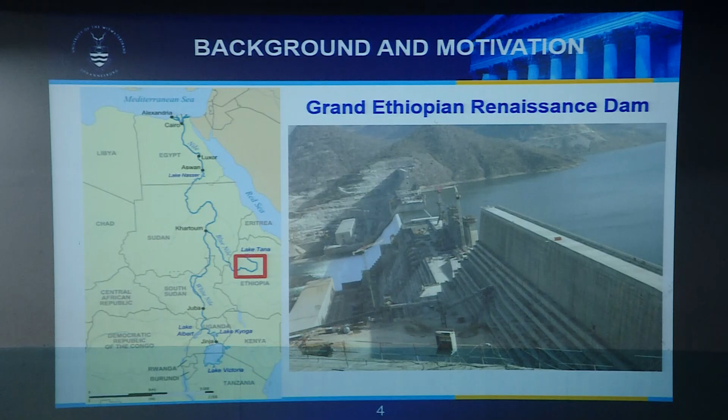I can confirm that this is not working. Maybe just migrate for me. Let me forget about this one. Just migrate forward. Yeah, that's fine.

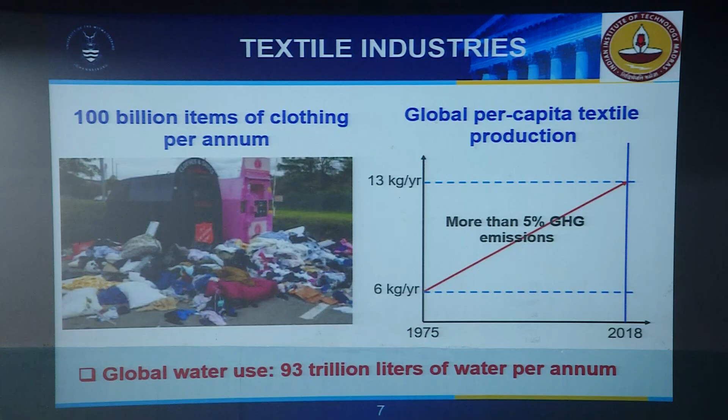Between 1975 and 2018, the global per capita textile production increased from 6 to 13 kilograms per year. That's you and I, roughly. This is how much the amount of clothing we use has grown since 1975. And that alone contributes more than 5% of greenhouse gas emissions in many forms, even before it gets to the grave, where you dispose of it or put it in landfill. The production, from extraction to transportation to processing, involves a lot of greenhouse gas emissions. And globally, this industry alone consumes about 93 trillion liters of water per annum. It's a serious industry that you must look into, and all of us are a part of that in one way or another. That is why we are paying attention to this. But if you go back into history as to where it exactly began, it was in 1989. Zara, by the way, I'm mentioning this.

Normally, I try to avoid names of companies, but this is now well documented everywhere from reliable sources that the first company to go into what is called fast fashion, which was really a game changer for the fashion industry, was Zara in 1989, where it took only 15 days from concept, from the mind of the designer, to where the garment was out there for selling. 15 days. And before then, it would take about 6 months.

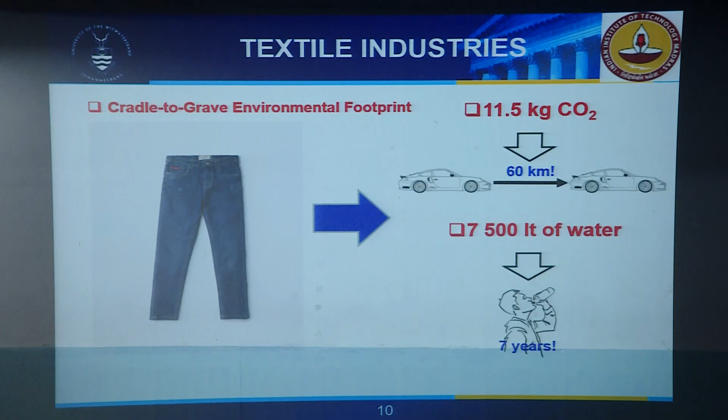And then the amount of water just for a pair of jeans from cradle to grave is about 7,500 liters of water, which is how much we drink in 7 years. A human being would drink that amount of water in 7 years' time. That is just one pair of jeans. So surely it is an industry that we should have been looking at for quite some time now.

And by its very nature, this industry happens to be a batch facility. Some of the presentations we had were about trying to move into continuous operations, particularly with the pharmaceutical industries. But some industries are inherently batch, and this is one of those. I don't think that this one will ever go continuous. So it will remain batch, which means that we still have to deal with the time dimension in this kind of a sector. So this is a typical example.

For example, here you are processing about 4 colors from white to dark. And it tends to have different stages, as you can see here. It mimics what you'd find in an agrochemical facility. That's another facility that cannot be continuous for a number of reasons. So these have their own unique features that make them remain batch. So it is a batch facility, which means that we have to come up with ways of solving this.

Now, batch plants, some of the colleagues here work in batch plants, are very difficult to analyze. We've been trying very hard for many years to come up with practical ways of synthesizing these operations, of properly designing these operations and optimizing them. And we still are trying to do that because of the nature of the mathematical model that comes from there. So continue.

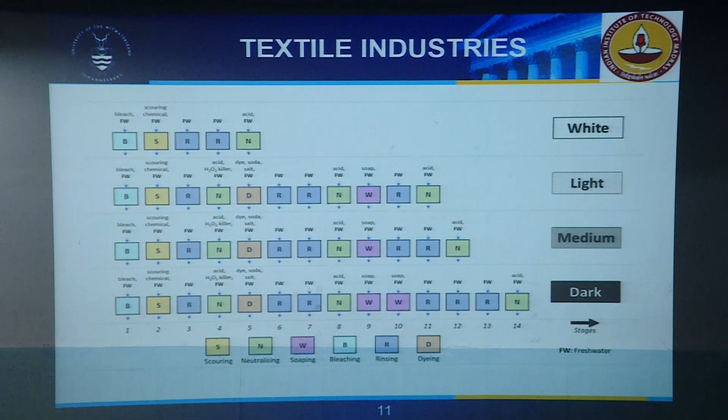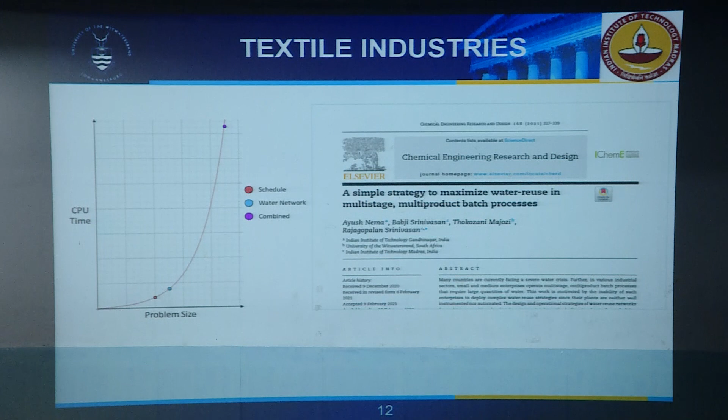The water network model alone will take its own time. But when you combine these two, then we are asking for trouble in terms of time. So we have to come up with ways of solving this, and that is the message this morning. So we came up with a method. This is very, very recent, by the way, maybe published early this year, if not late last year, where we came up with the bridging algorithm.

Now, when you do scheduling of batch plants, we always have to contend with the representation of the time dimension. We can either have what we call the discrete time formulation, where the intervals are equal over the time horizon of interest. And we've come to abandon that over the years because it's concomitant with a very high number of binary variables. So we are moving into the continuous time representation.

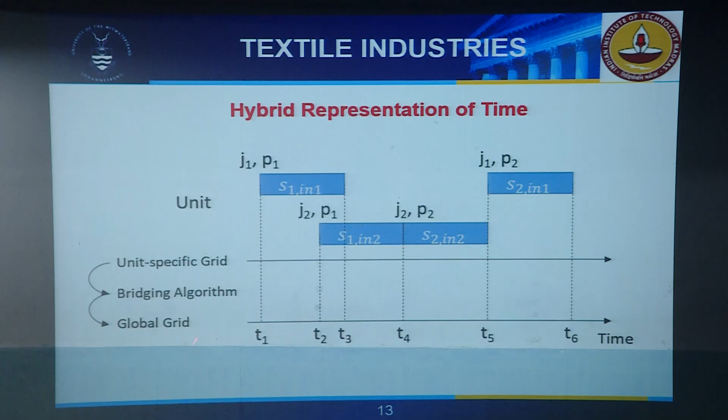So what we did was, on the unit-specific time grid, we do our scheduling. This is very, very efficient just for scheduling. We did not look at water, we just do the scheduling there. So we know exactly when a particular unit has to be active, and what that unit has to be processing at a given point in time. That's the essence of the scheduling here. And all of these problems are in the makespan minimization zone, meaning that we know exactly how many batches we have to produce. What we don't know is the minimum time to achieve that. So this is the scheduling problem.

And then after we've done the scheduling, we apply the bridging algorithm. We introduce two new parameters. I'm not going to go into the detail of this, it's published already, but the new parameters link this dimension to that dimension. What that allows us to do is that when we do the water minimization, we no longer have the integer variables, because they are fixed from scheduling. So we only have a non-linear problem, which is not really difficult to solve. It's not a discrete problem. And ultimately, we do the iteration to get to the solution. I'll give you the results now.

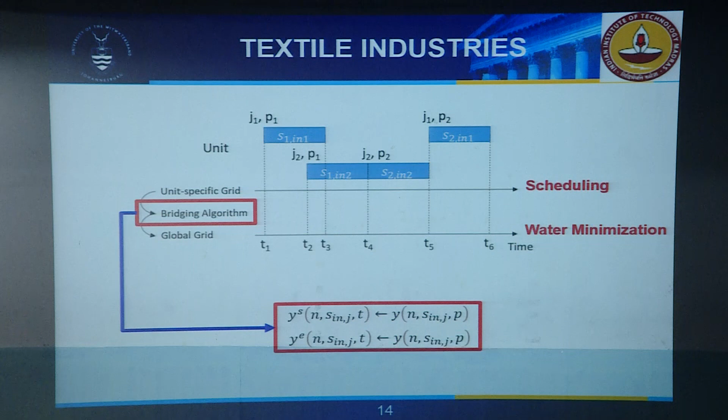So basically, this is a hybrid representation of the time domain. You either have one of the two, but to put them together is not something that we had seen in the past. And it does come up with some benefits. It doesn't mean the problem is entirely solved, by the way. So this is the algorithm in its entirety. We have all the parameters and all the constraints, our typical scheduling constraints. We have a traditional MILP model, which is based on the unit-specific event, and then we solve that model using our solvers.

And there are a number of solvers that can do this. The one that my students seem to be really attached to at the moment is BARON. But I've come to realize that BARON is not your best solver. If you want a global optimum and you can find the solution, maybe BARON is the way to go. But there are solvers which are also powerful in the same platform, GAMS, that we've been using all the time. So this is a MILP, then you get your optimal schedule, and then this is where you apply your bridging algorithm.

And then from there, with your optimal schedule and the bridging algorithm, you have all your binary variables now as parameters. You have an NLP problem there. This is where you do your water minimization, and that should give you your optimal water network.

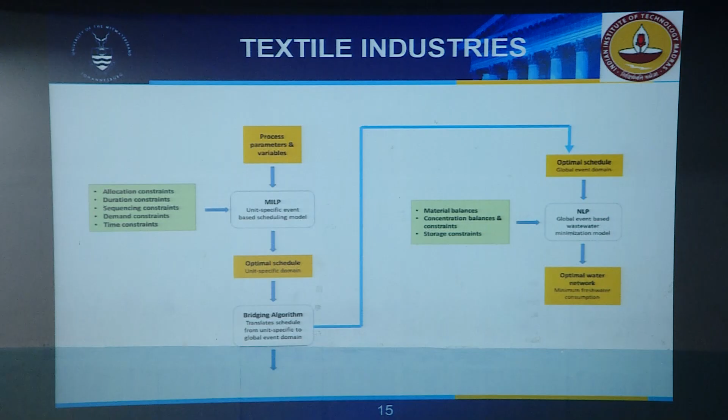And then in between these stages, we've allowed some storage, so some of the water can be stored here. We do this really as the time buffer. The storage provides that buffer for time, meaning that you can actually override time. You can store some of the material here that can be used later. So we need storage in order to minimize the amount of water.

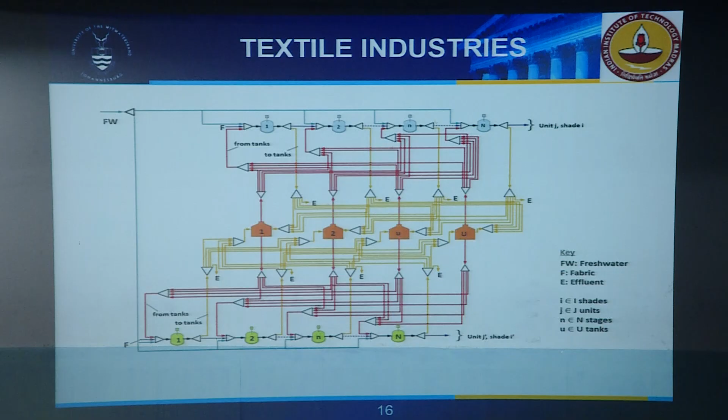Continue. And if one looks at this, one of the case studies that we looked at, we are given all this information. In fact, we've been working with this case study for a while because it's based on a company here in India. I can't remember the name of the company, but Prof. Raja Gopalan Srinivasan and Prof. Babji Srinivasan would know perhaps which company it is. We've been working with this case study in particular from an industrial partner in India.

If you did attend Babji's presentation, you would have seen that he also spoke about more or less the same problem. So here you've got 14 stages, and each stage will have its own units. These are the types of materials that have to be produced: colors, white, light, medium, and dark. And then we are given all the information as well in terms of the duration in each of the stages in the unit.

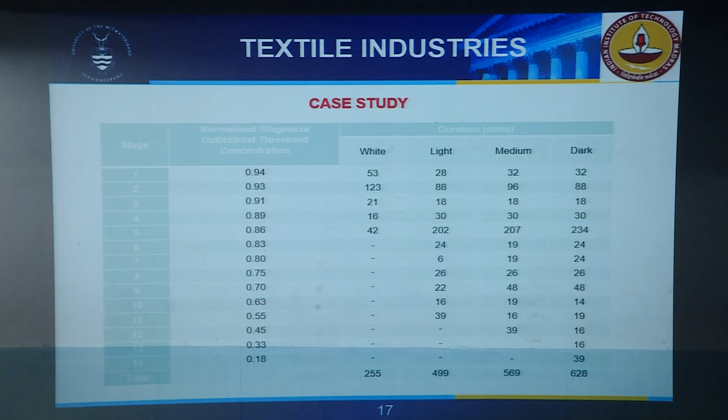Okay, continue. And then these are the storage tanks that you have there. These are the 14 storage tanks that you have. It is by chance, by the way, that we have 14 tanks and 14 stages. Just by chance, you can have any number of stages.

And then we have the fresh water that you get here if you do the optimization. There's a gap between these two, as you can see, which means that this particular problem was solved. We have very, very good results, but it was not solved to zero gap between your current solution and your actual solution. So basically it's still suboptimal, but it's much better than what we had before.

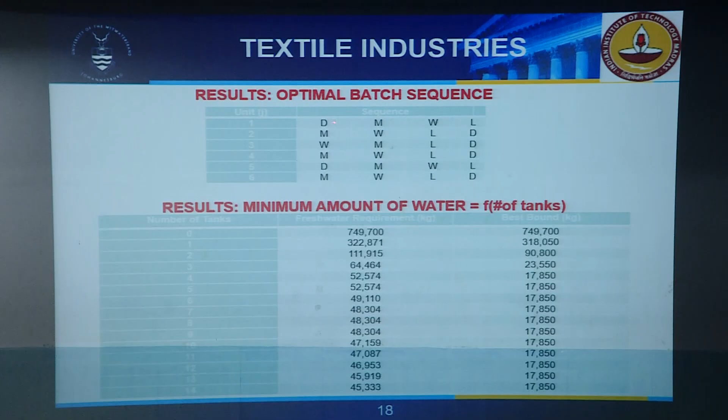And here you've got the sequence in each and every unit. So these are the units that you have there. In each and every unit, this is the sequence of the colors: the dark, the medium, the white, and the light.

Continue. And one thing that we saw also was this. We've always known this, I just illustrated it. Here there's an element of practicality. We might not need to go all the way to that number of tanks. We might decide to stop somewhere there, depending on practicality.

The amount of water is still decreasing if you go all the way down there. It's still decreasing, but very, very, very insignificantly. So somewhere here, you might just have to stop in terms of the number of tanks and also in terms of cost.

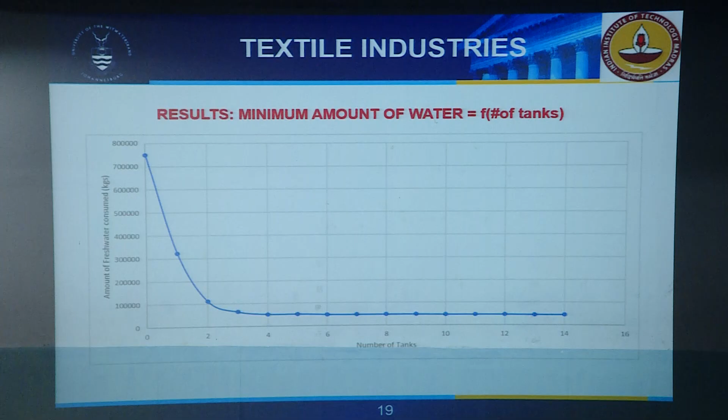That just tells you how difficult it is still to solve this problem. If you're looking at about, say, even 24 hours for a combinatorially complex problem, it's still difficult to find a solution in reasonable time. We do scheduling really so that we can react to whatever situation in practical terms, which means that the CPU time ought to be in the region of minutes, if not seconds, for it to be practical. And we are nowhere close to that.

But at least we can see the solutions. It is progress. It is very much, colleagues, similar to nuclear fusion. I think you had the hype about nuclear fusion. Even yesterday, everyone was still talking about nuclear fusion. It's a very small step, but it's in the right direction. So it is the same thing here.

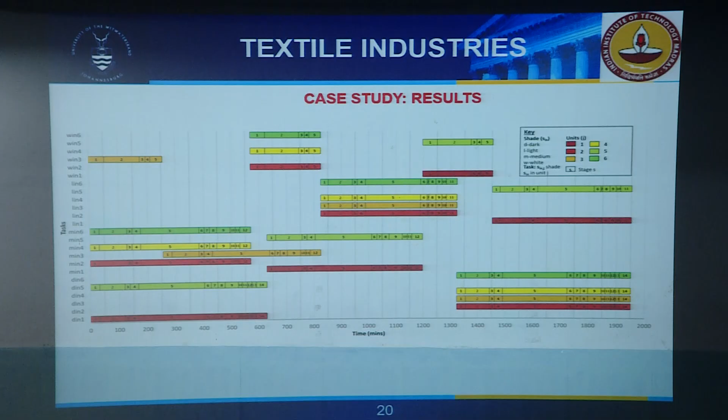So let's continue. Now I will talk briefly about the shale gas exploration.

As I say, you go to the US, I'm working with some guys at Texas A&M, Professor El-Halwagi, also one of the leading figures in process systems engineering. They've been working on this project for quite some time. And the question I asked was, why still on hydrocarbons when we could be looking further than that? But they say the reality is it's there at the moment, it's on the ground, and we should find ways of doing it in the best way possible.

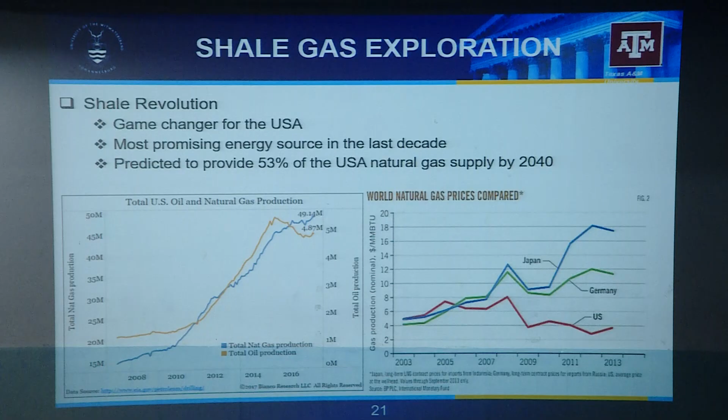Let's continue. The challenge, which is why we are involved in this work, is that shale gas is extracted through hydraulic fracturing. That is how you get your shale gas. That uses a lot of water, and there's a lot of wastewater. When we say highly water intensive, we talk about fresh water and wastewater. A lot of water is generated there. That is the biggest problem. And of course, there's a lot of flaring where you actually do the extraction of the gas, and there are issues of production costs. So we had to take all of this into account.

So it becomes a very interesting mathematical problem in terms of optimization. What we're looking at here is a system with both dry gas and wet gas. Dry gas is the gas you can take directly to customers, and wet gas is the gas that will need further processing. So we're looking at both of these together.

Here is the nature of the problem. We are dealing with water. We have a membrane system so that we can regenerate our water and reuse it in the process. And of course, there's a gas network to deal with the distribution of the gases. Then we have to do the well-pad scheduling, and all of that constitutes what you call hydraulic fracturing. So that is the system, in short, that we are looking at.

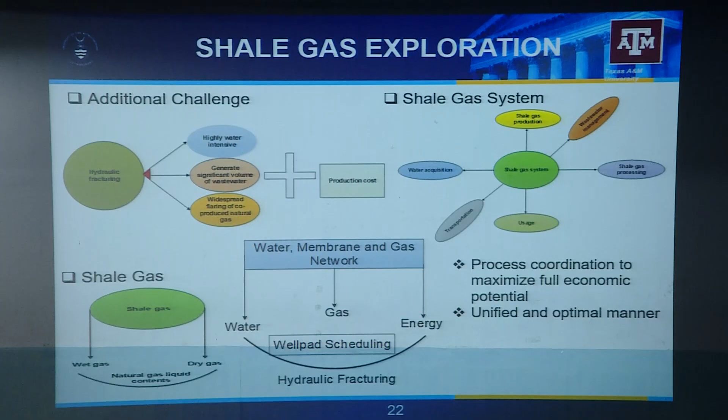We have water acquisition that you have to worry about, shale gas production, the usage of that, transportation, as well as the processing of the gas.

And these are the parameters that you'd have to be given. So you are given all this information here. In most instances, this is known very well, by the way — this information is available for every well pad. And then we have to determine the amount of water in particular that you have to use. In this case, you also have to look at the distribution of the water, and the distribution of the gas, because we have both dry and wet gas.

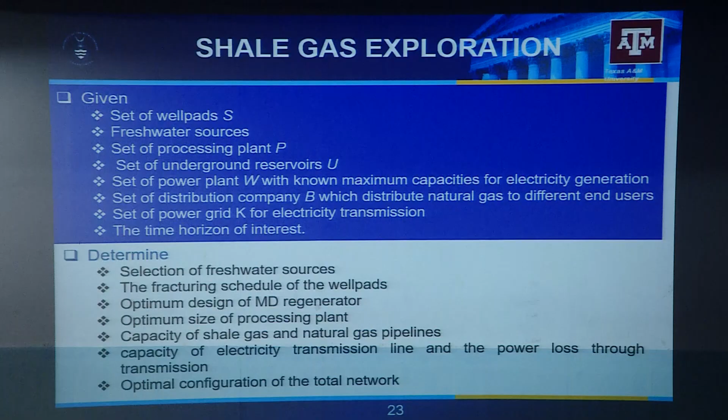Again, here we started off with this superstructure, where you've got the water impoundments. This is where you store your water. Uninterrupted water supply is the water that will always be there all the time. It is counterintuitive, by the way, that what you see there is a river, the representation of a river or a pond. So this is interruptible water supply.

It's counterintuitive because we'd expect that from the river to be uninterrupted. Actually, you do have droughts that make that inaccessible. Whereas if it's brought in by tankers, that can always be organized — sometimes they have to go a bit further, but there will always be a guaranteed amount of supply there. So this is uninterruptible freshwater supply, and this is interruptible. You store it in the impoundments, and then ultimately you've got the well pads where you process this water. These are the well pads where you get your shale gas, and ultimately your water can be treated.

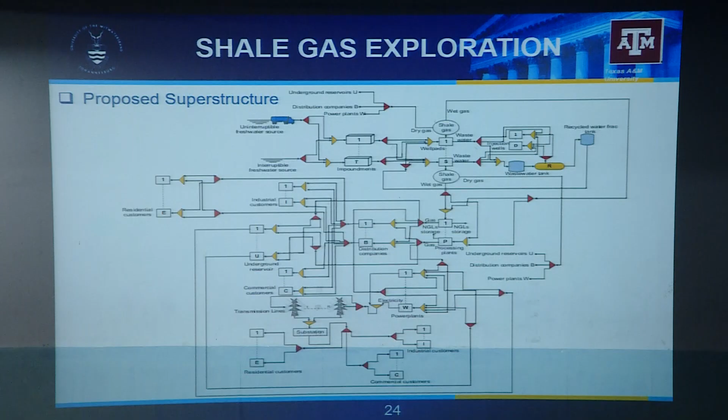Then this is the regenerator that I spoke about. In particular, in this case, we looked at membrane distillation as the regenerator. You also have the power plants where the water would end up, and then you've got the customers as one of the recipients of the gas. So in a nutshell, this is how the superstructure would look like — this is the basis of your mathematical formulation.

Continue. And again, these are the constraints which I did not bother putting out in mathematical form — these are typical scheduling constraints that you would need in a typical plant. So what we're doing here is taking the work that we've been doing for chemical plants and applying it in a different setting altogether, which is shale gas exploration.

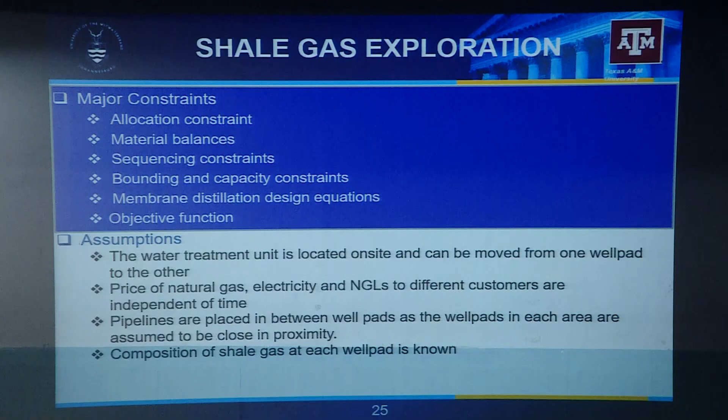And then these are the assumptions that are made. All of these assumptions, by the way, are very, very practical assumptions. For example, the price of natural gas is independent of time, which is the case because it's regulated in most instances. Let's continue.

And then the idea here is to maximize profit, and our profit is defined as the revenue minus the total operating costs. So these are all the costs that we're talking about here, the operating costs.

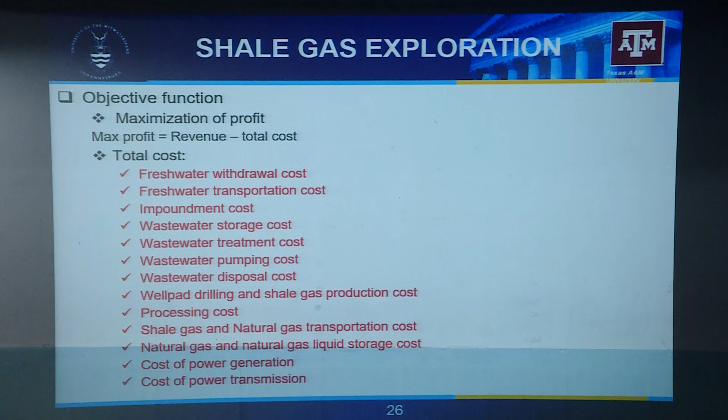Let's continue. Looking at one of the case studies, this is now a practical and arguably the largest shale play in the US, Marcellus. So almost everyone working in this area will give you this case study. It's a practical case study, actually. Most people will be trying to solve this problem because it's a real life problem.

So it was studied, these were not the first, by the way. In 2015, it had been studied before, but not using a systematic method. This was one of the first systematic methods, and I think this is the work of Professor Grossmann at Carnegie Mellon University, this case study.

So here you've got 14 well pads, and then we are looking at a 3-year time horizon, and we looked at scenarios where we look at the wet gas network as well as the dry gas network.

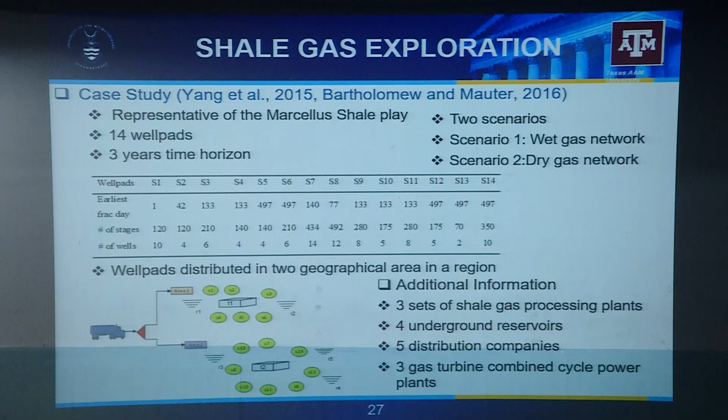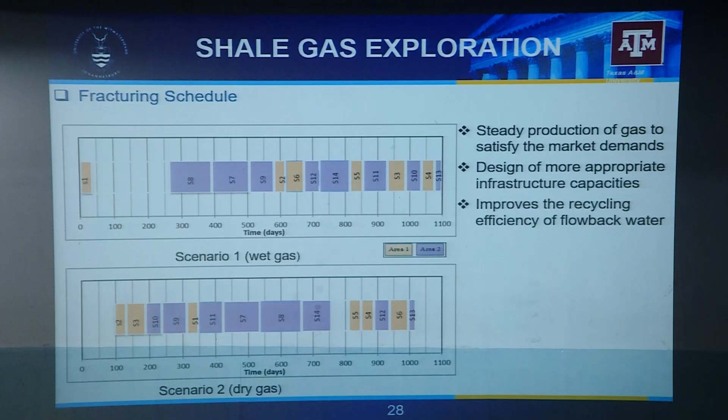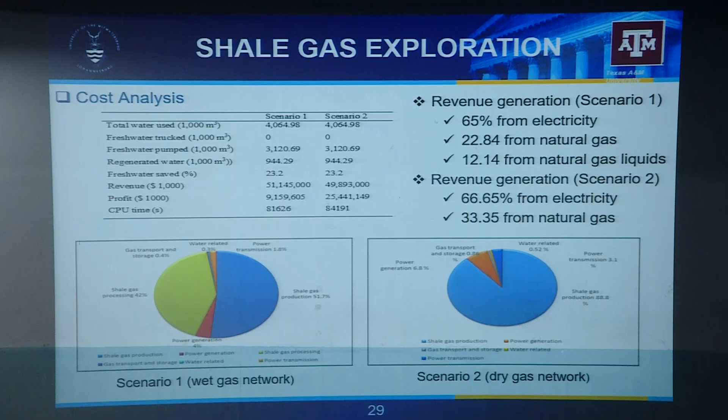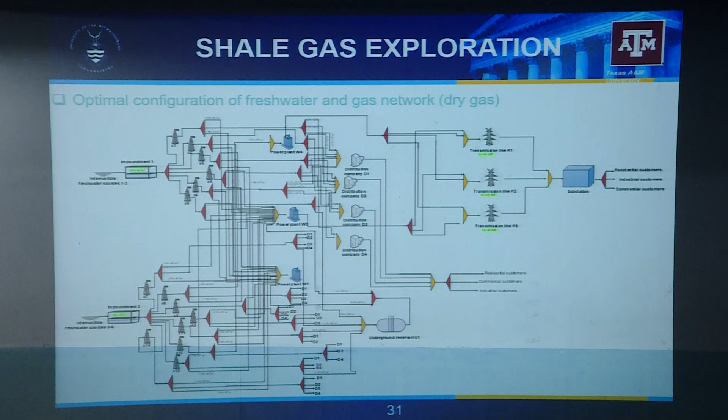The next one is the dry gas scenario. This one would be a bit cheaper because here you don't need to have any treatment facility for the gas. The gas is dry already.

And then in closing, I just want to say a few things about this unit commitment problem. Really what this pertains to, and I'll be closing now, is making sure that we have secure supply of energy.

The reason why South Africa does not have electricity at the rate at which it's supposed to is a very strange one. We understand why Europe is having issues with energy, but the South African problem is very, very interesting. We've got 48 gigawatts of installed capacity. We use, under normal circumstances, nothing more than 30 gigawatts. So we've got more installed capacity than what we use, but we still don't have electricity. It just defeats all logic, does not make sense.

And one of the reasons for that is because we've got aging infrastructure. So what is called the EAF, the energy availability factor, is very, very low in each of the plants, sitting below 40%. As soon as you go below 50%, even in your typical chemical engineering plant, if you go below 50% in terms of availability, that plant is as good as not there. So that is basically what we are having. It's because of the issue of the aging infrastructure.

So for those who tend to visit me at times, they must brace themselves for that. Iqbal, there might be load shedding next time you come there.

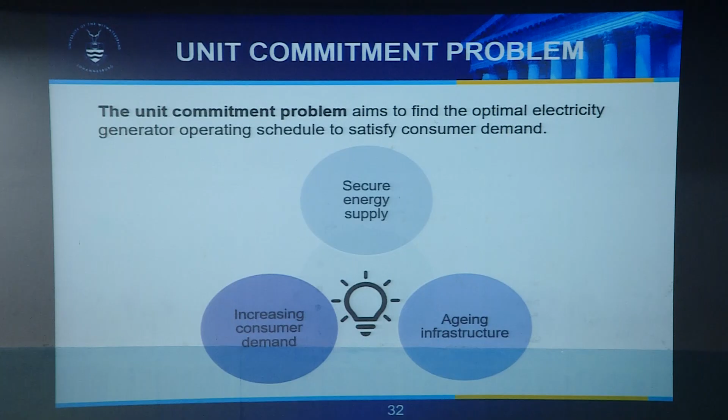So let's continue. And then this is the typical information that is given. But the point that I want to raise, this is general stuff in terms of scheduling.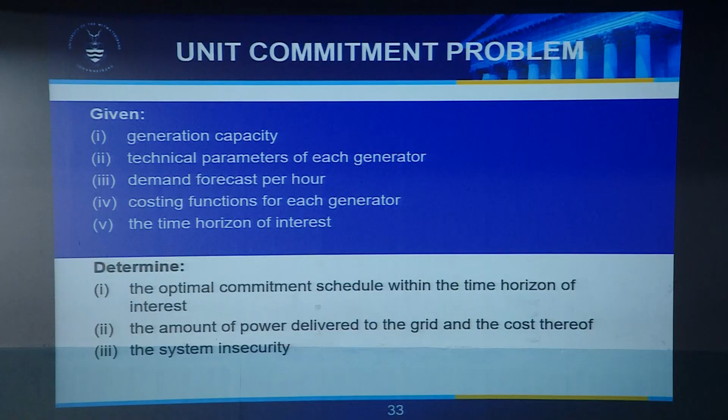We know this, so we're applying again what we know. We're working with the government entity known as Eskom, which is the sole supplier of electricity, to try and solve this problem. This is your typical scheduling problem. And the problem itself has been solved, by the way, in different ways in the past.

So there are two types of the unit commitment problem. The profit-based unit commitment problem, which will not apply in South Africa because we're a regulated country in terms of electricity, and we've got a main supplier, which belongs to the government. So this applies where we have a deregulated system, so everyone wants to make profits. It might happen in future when we have our independent power producers, but for now, it's not the case.

And then we've got the security constrained unit commitment, where we've got vertical integration. So this is the case with South Africa. And the idea there is to try and maximize the spinning reserve. The spinning reserve is your extra generation capacity from some of your committed units. So the units are already working. How do you make sure that you maximize that spare capacity so that whenever there's an emergency, you can ramp up as soon as possible? So that's the idea behind this.

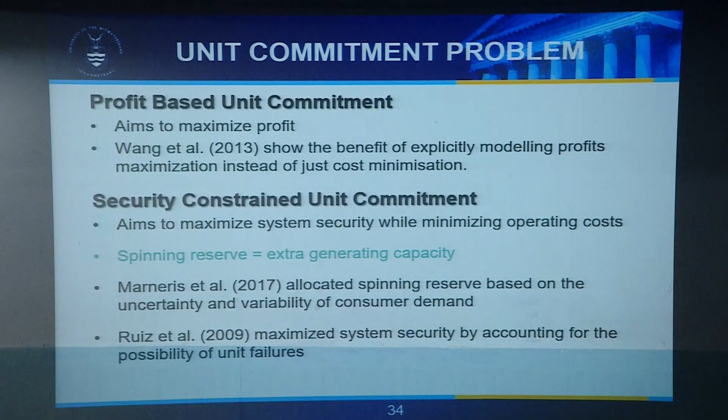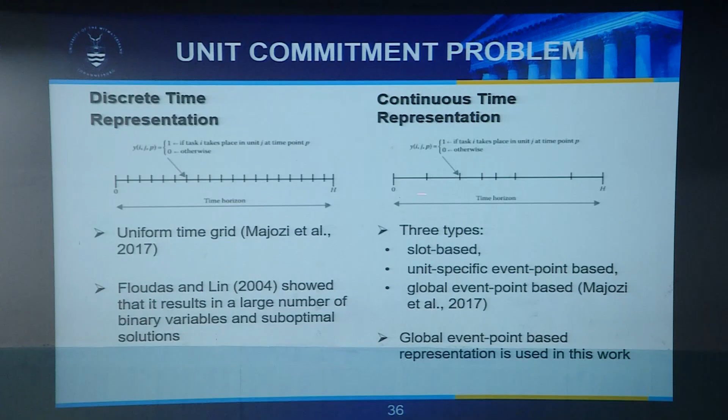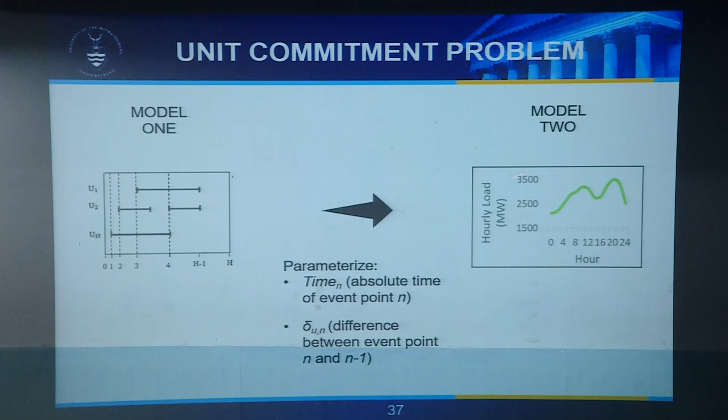Let's continue. This one is animated. So basically you'd solve your model here initially, and then once you've solved your model, this is a continuous time model, and this is the global event point modeling. We do the same parameterization that we did for the textile industry. So we fix some of the variables here after scheduling, and then we map the difference between what you would have received via the discrete time formulation and the continuous time formulation in order to get the final model that uses the demands. And we also include the uncertainties in the demand.

So basically in the cost function, this is the cost of fuel, and this is the cost of startup of the units. So we've got a hot startup and a cold startup. A hot startup is really saying the unit is already working, and then we ramp it up to the desired capacity. The cold startup is not working. And when I say units, I'm talking about the turbines. So these are the generators that we're talking about here.

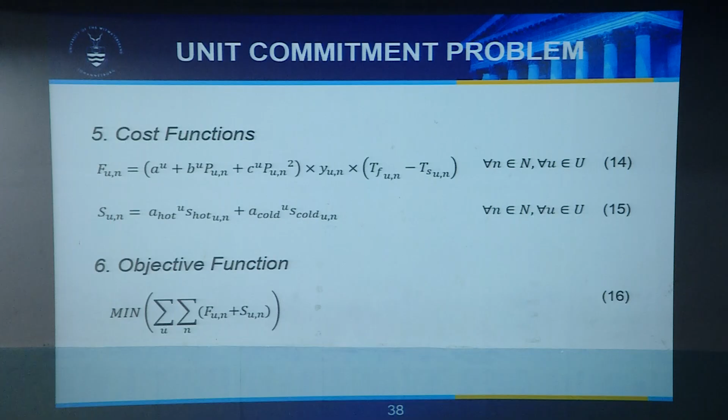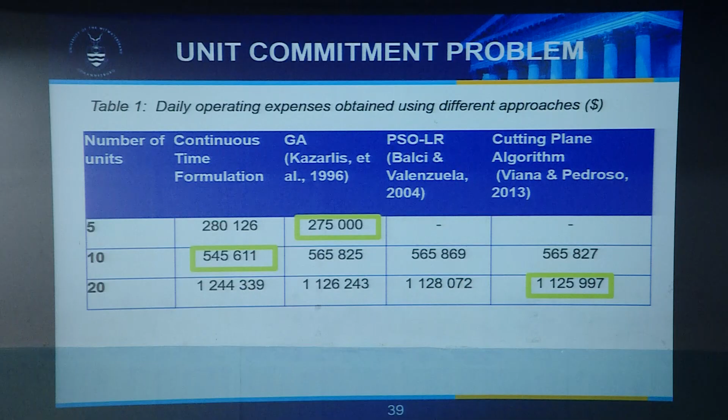So if you look at the results, let's just continue. The point I wanted to illustrate here is we looked at a problem with 5 units. The 5 units are the 5 generators, your 5 turbines, 10 turbines, and 20 turbines. And we found that different formulations perform differently according to the number of turbines that you have. This is a problem that is still being solved, because these were fixed a priori. These are not the outcomes of the optimization exercise. So we fixed this beforehand, and then we solved the problem. We can see that it does depend on the number of generation units. And this is a very good observation.

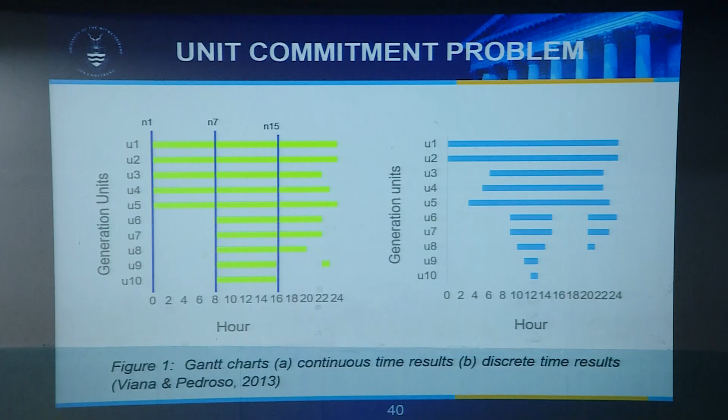And then this is the scheduling. The reason why we get a good performance for 10 units is because you can see here, you don't have too many startups and shutdowns, which is very good. But the more startups and shutdowns you have, the more costly it is to run the facility. And of course, in terms of availability, it affects it. So I'll be closing now.

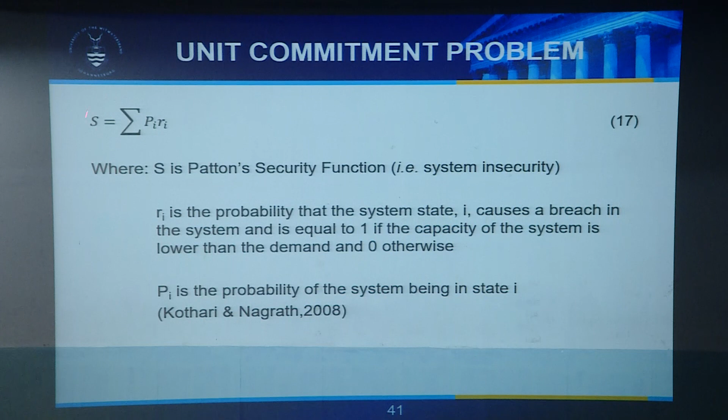So this is the Patton's security function that we use, which is the measure of system insecurity. So the idea is you want to reduce this; you want this value here to be as small as possible, ideally. And for this particular problem of ours, just continue.

For our problem, that value was sitting there, which means that you've got more availability than you would have. This is the discrete time formulation there. And that result has been obtained by a few authors.

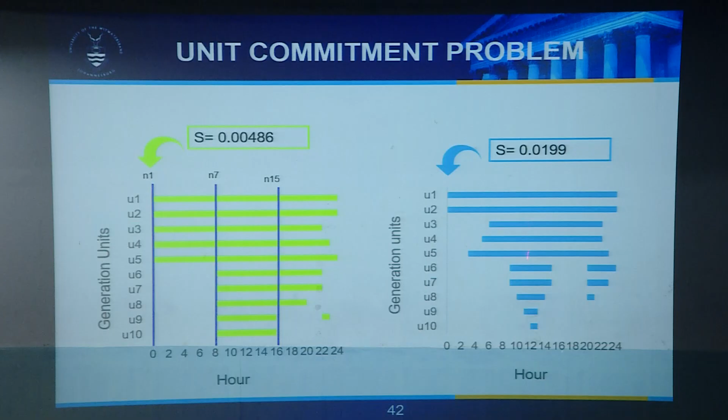Let's continue. What we are trying to do now is to look at a much longer time horizon, looking at cyclic methods. And of course, one of the ways of doing it is to look at wraparound scheduling. So this is the type of work that we're trying to do now, to look at much longer time horizons instead of the short time horizon.

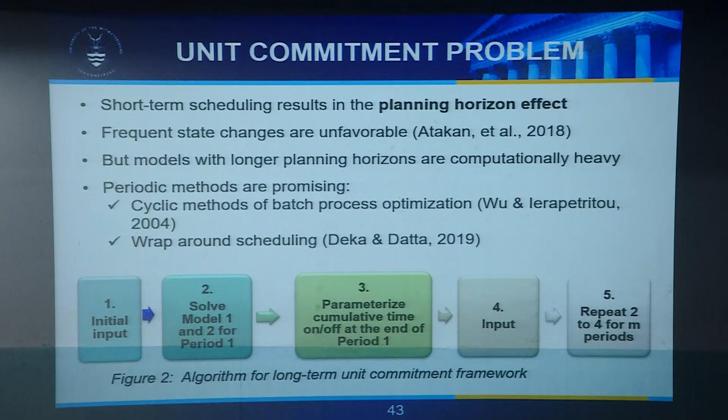Let's continue. And then if you look at some of the results that we've gotten, this is the last slide, colleagues. Continue. No, just back. Yeah. Just back a bit.

If you look at the results that we've received here, for non-periodic long-term scheduling, in other words, you solve the problem without looking at cyclic scheduling, which is very, very difficult. It takes just a bit longer. And the result, of course, is a bit low in terms of the overall cost. So you spend less, because the idea is to minimize the operating cost here.

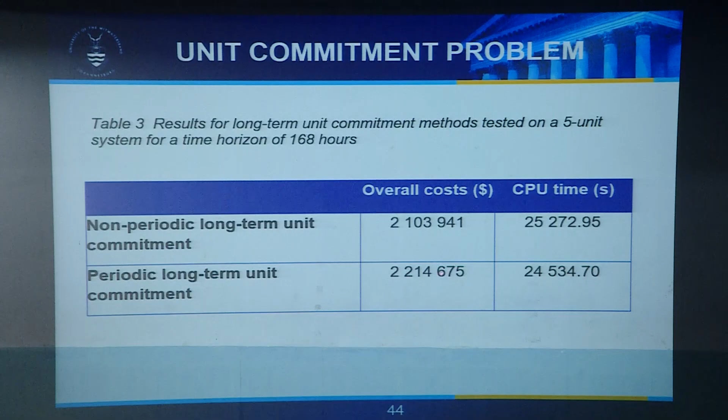And in periodic scheduling, there is some degree of freedom that you lose by going the periodic route. And there you can see that you compromise on the overall cost. And of course, it also takes a very long time.